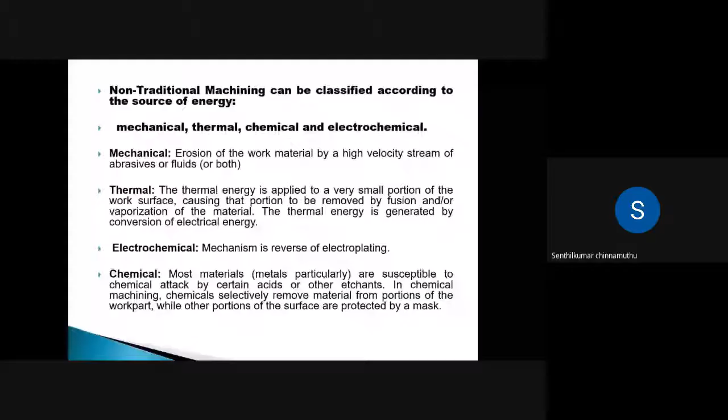In electrochemical machining, the electrochemical reaction is the reverse of electroplating. The material is removed atom by atom, which is called electrochemical machining, under the electrochemical category.

In chemical machining, if you want to remove some portions of material on the surface, we have to mask it, and the material to be machined is exposed to the atmosphere, kept inside acids. The acids remove the material atom by atom, which is called chemical machining.

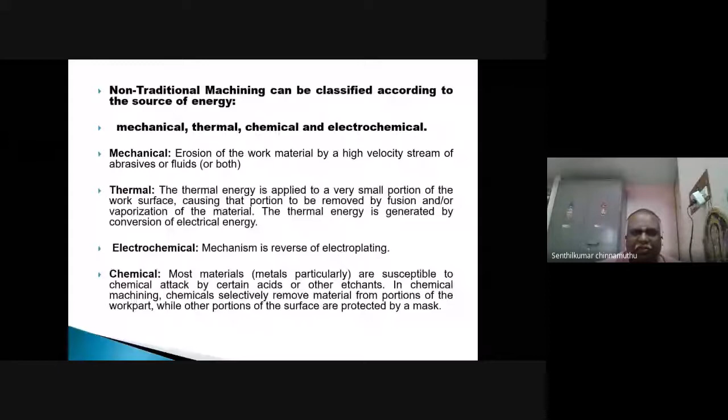Next, electrical discharge machining. I hope all of you are aware that electrical discharge machining is one of the processes in non-traditional machining.

In this process, the formation of a recast layer in the zone just below the machined surface is a common occurrence. The formation of this recast layer on the surface of the workpiece is considered a potential opportunity for researchers to deposit a layer of desired materials.

You might have seen that during electrical discharge machining, after completing the process, if you cut and look through the microstructure, you might see a heat affected zone or recast layer. If you check this recast layer using EDS element analysis, you might find that the layer consists of tool material, workpiece material, and carbon.

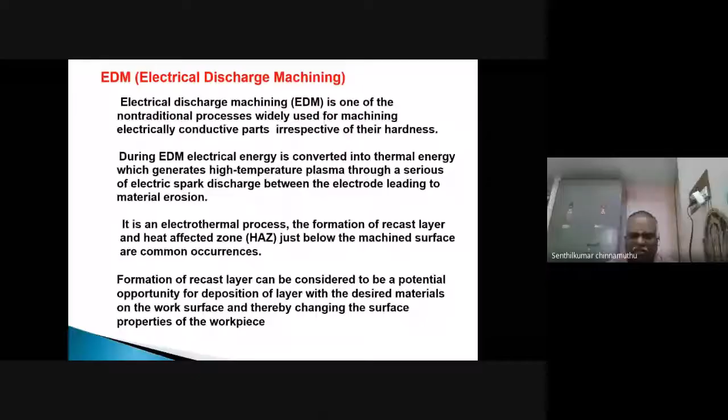Lightweight materials are nowadays being used in aerospace and automotive applications to achieve better energy efficiency and reduce the weight of the component. However, it cannot withstand wear under high load, especially in sliding contact or moving parts.

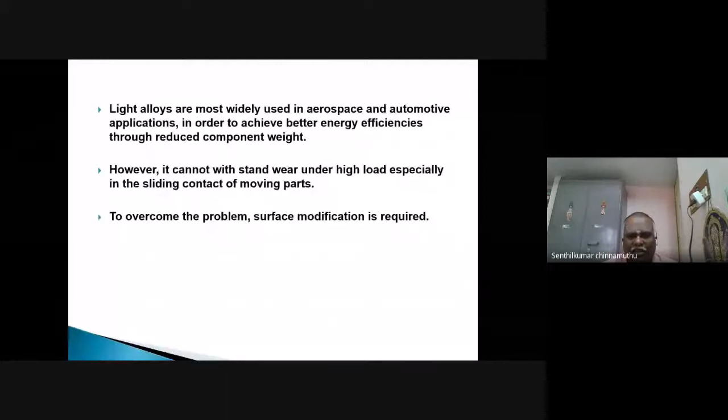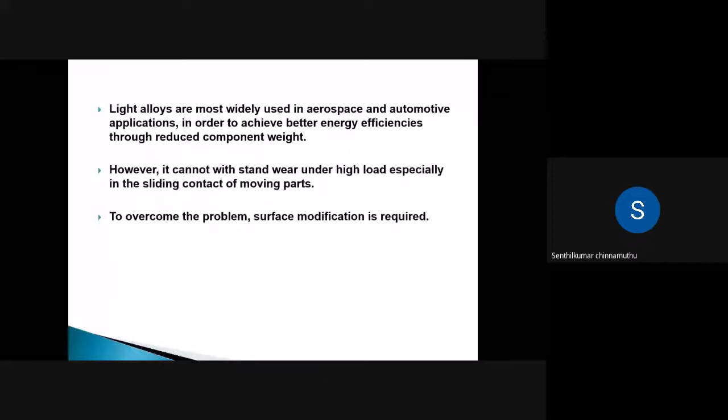If high load is applied, and two parts get mated and slide against one another easily, wear resistance is very low. To overcome this problem, surface modification is required. Many surface modification processes are used, such as PVD and CVD. We have to classify these.

Why do we go for surface modification or surface coating? Surface coating or surface modification is used to enhance surface properties—corrosion resistance, hardness, heat resistance, wear resistance—without changing the original characteristics of the base material.

There are several methods for obtaining different types of surface coatings, which may be classified as thick coating and thin coating. Under thin coating, we have physical vapor deposition, chemical vapor deposition, electrochemical deposition, ion implantation, and electroless plating, which give you 0.002 mm to 0.004 mm of thickness. That is called thin coating.

Thick coating includes plasma coating, thermal spraying, laser cladding, and electro deposition, which give 0.076 to 0.25 mm of coating thickness, which is called thick coating. The above said coating processes need sophisticated machines which incur higher cost, and the process is also complicated.

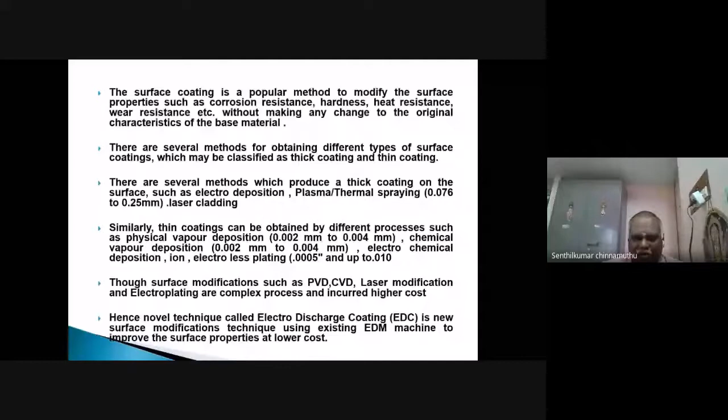The novel technique developed is called electro discharge coating, where we machine or coat the material at less cost using an existing EDM machine to improve or enhance the surface properties.

Electro discharge coating is basically an EDM process. In EDM, the anode is connected to positive, that is the workpiece is connected to positive, which is called anode, and the tool material is connected to negative, which is called cathode. So the current is supplied between these two.

In the EDC process, the process is carried out with reverse polarity, known as electro discharge coating. Here the workpiece is connected to negative and the tool material is connected to positive.

The tool powder metallurgy tool is used as an electrode. Instead of a solid electrode, powder metallurgy electrodes are used, that is, the desired material.

If you want to coat tungsten carbide or titanium diboride, let us take titanium boride or tungsten carbide as the electrode. It depends upon our choice. During the process, material from the tool electrode is transferred and deposited on the surface as a hard layer.

It can be used to enhance the tribological properties such as micro hardness, wear resistance, and corrosion resistance, without any physical change in the workpiece material.

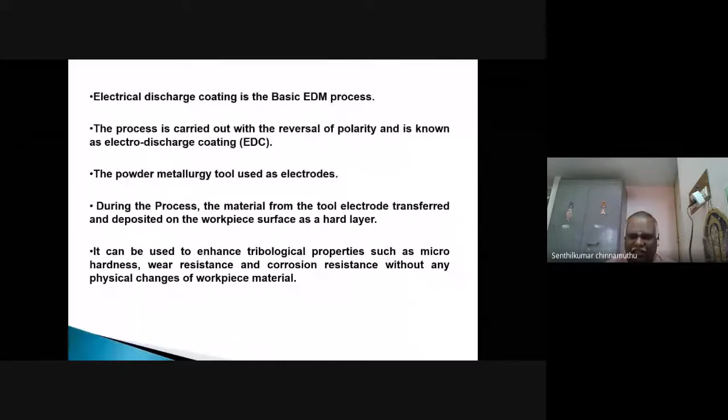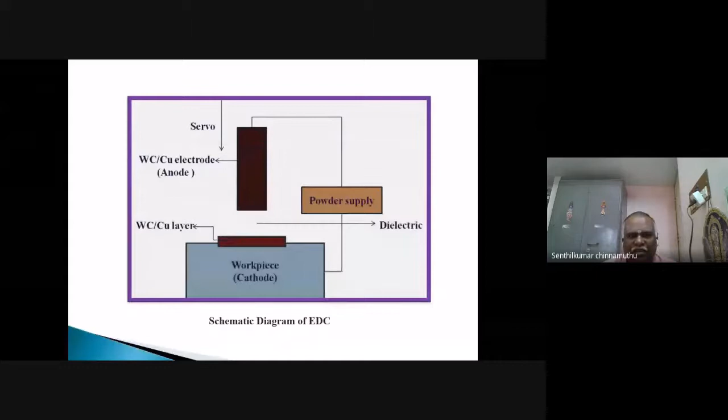This is a schematic diagram of EDC. Here the workpiece is connected to negative, and the tool, that is the powder metallurgical tool, is connected to positive, with a power supply given between the two.

The workpiece attracts more cations, that is positive ions, and the tool attracts the anions, that is negative ions. A larger amount of material is disintegrated from the tool electrode and deposited on the surface of the workpiece. This is the schematic diagram of electro discharge coating.

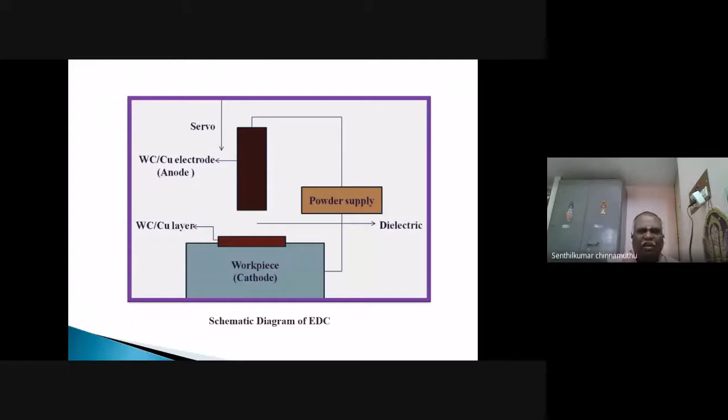Advantages of electro discharge coating: it is less expensive because there is no need for sophisticated equipment or special equipment to control the coating thickness.

Hard coating can be easily created on the workpiece using the existing EDM machine. The coating can be created in different zones of the workpiece with different areas, and the coating speed is also very fast.

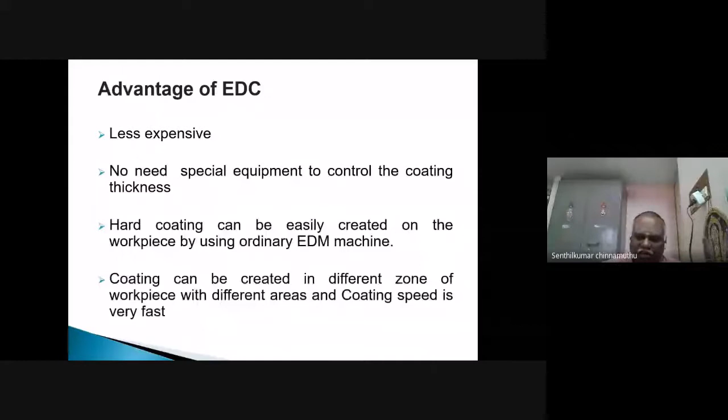Application: EDC can be used in rolls texturing, improving hardness and performance. It can be used in various industrial applications like tool, die, and mold manufacturing industries to improve wear, corrosion, and oxidation resistance of parts.

It can be used to enhance the wear resistance of lightweight alloys used in the aerospace and automobile industries.

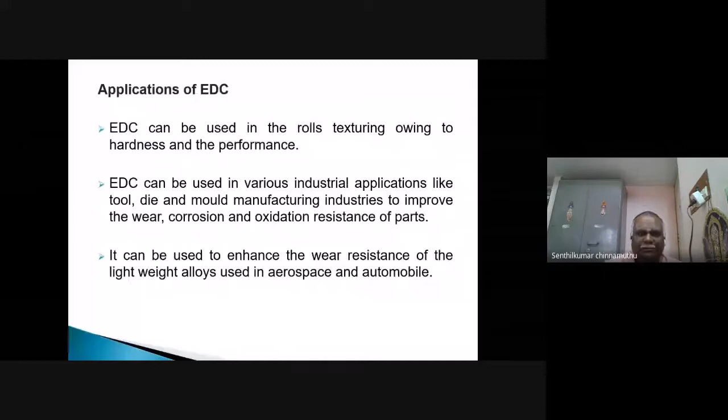Let us consider a magnesium alloy. In this case study, we select a magnesium alloy as a lightweight material and coat it with the help of tungsten carbide using electro discharge coating. Why do we go for magnesium alloy?

Nowadays, magnesium alloys are being adopted by the automobile and aerospace industries because of their lightweight compared to aluminum. But the load carrying capacity and wear resistance of this material is very low, so we go for electro discharge coating.

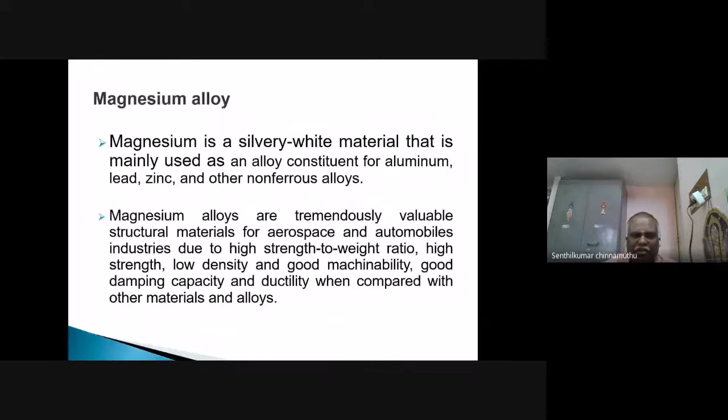Magnesium is a silvery white material mainly used as an alloy constituent for aluminum, lead, zinc and other non-ferrous alloys. It is a valuable structural material in automobile and aerospace industries due to its high strength-to-weight ratio, low density, good machinability, good damping capacity and ductility compared with other materials and alloys.

Advantages of magnesium alloy: lightweight and low density, high specific strength, good castability, suitable for high pressure die casting, good machinability, high thermal conductivity, high dimensional stability, and higher vibration absorption.

Applications of magnesium alloy: cylinder head cover, engine intake manifold, motorcycle wheels, helicopter gearboxes, key lock housing, and steering wheel.

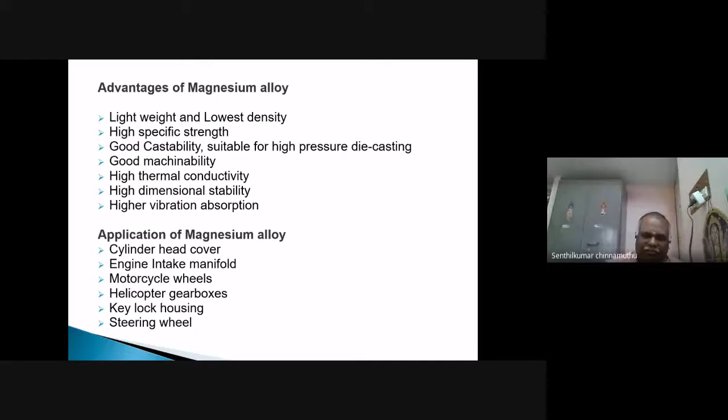The electrode material chosen is tungsten carbide and copper. Copper is mixed with the tungsten carbide powder to conduct electricity.

The magnesium plate of 170 mm length, 50 mm width and 5 mm thickness has to be taken for the electro discharge coating.

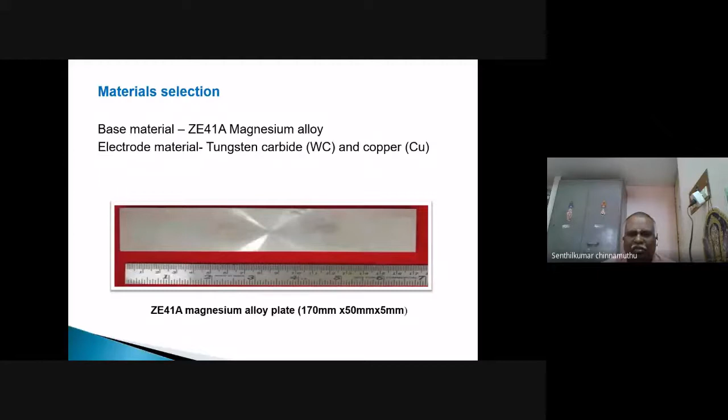The properties of ZE41A magnesium alloy are: density of 1.9 gram per centimeter cube, melting point of 532 to 638 degrees Celsius, specific heat 970, thermal conductivity 24, coefficient of thermal expansion 15.1. And the properties of tungsten carbide and copper powder follow.

The copper density is 8.97, melting point 1082 degrees Celsius, specific heat 385, thermal conductivity 393, coefficient of thermal expansion 16.5, and a particle size of 4 microns.

Similarly, for tungsten carbide, the density is 19.29, melting point is 2870 degrees, specific heat 138 joule per kilogram Kelvin, thermal conductivity 110 watt per meter Kelvin, coefficient of thermal expansion 5.5 micrometer per meter degree Celsius, and the particle size is 4 micron.

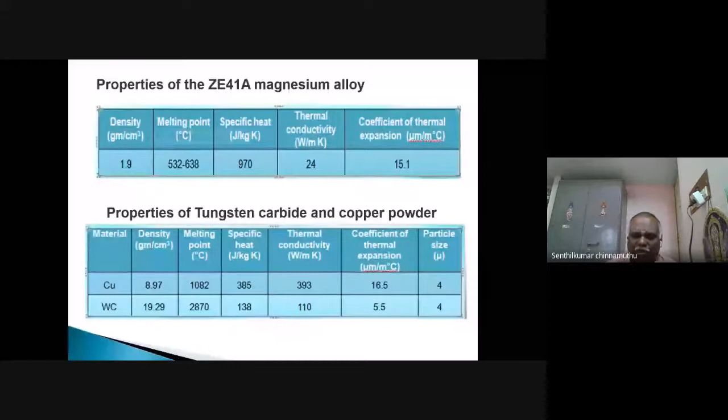Experimental planning and procedure: electrodes were prepared by powder metallurgical method using a combination of 50-50%, that is tungsten carbide 50%, copper 50%, in semi-sintered and sintered forms. Two types of electrodes were used, semi-sintered and sintered, to compare both tools and evaluate the hard deposit layer and its characteristics, including how much material is deposited using each.

We have to evaluate what the mechanisms are. EDC experiments are conducted using the prepared electrodes, and wear tests are conducted, that is, the wear resistance of the coated specimen was evaluated using the optimized parameters.

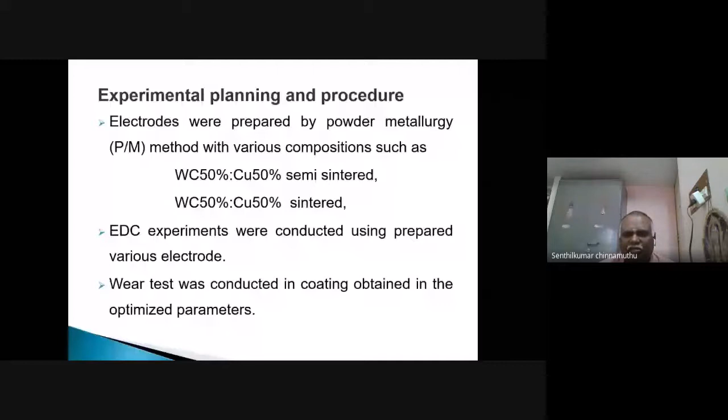The double cone mixer parameter is 300 RPM, rotating at that speed to get the proper mixture. The time taken for mixing is 30 minutes, which is taken from the literature, along with the 300 RPM speed, to achieve proper mixing.

Finally, we compress the powders inside the cylindrical die using the 150-ton hydraulic press. Various pressures were selected to study the properties and evaluate the coating characteristics at each pressure. The powder metallurgical green compact electrodes were prepared using this press.

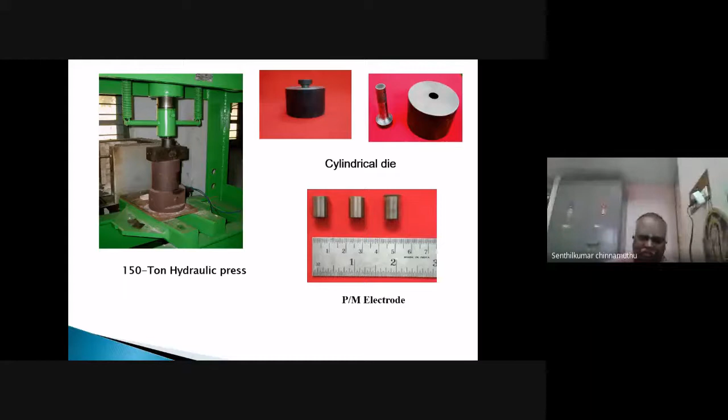Sintering is carried out in a tubular furnace with an argon atmosphere, with sintering time of 20 minutes. Why argon gas? Without it, atmospheric air inside the furnace contaminates the green compact. Using argon gas evacuates the atmospheric air, making the environment inert, so we can obtain a proper sintered or semi-sintered product.

The sintering temperature for semi-sintered is around 600 degrees Celsius for 20 minutes. For full sintering, we go to 900 degrees Celsius for 20 minutes. So for the 50-50 combination of tungsten carbide and copper, semi-sintered requires 600 degrees Celsius for 20 minutes, while sintered requires keeping the component in the furnace at 900 degrees Celsius.

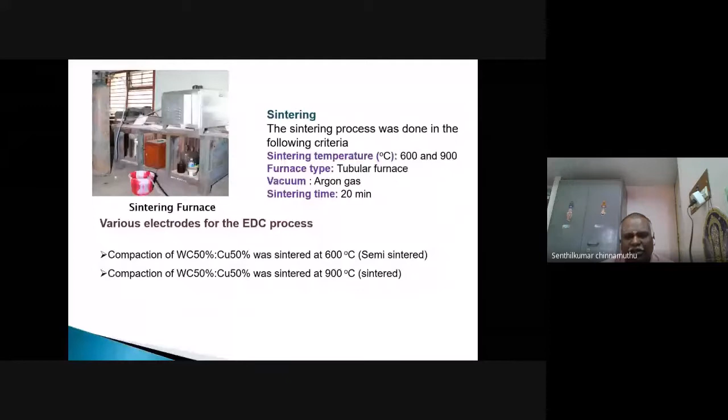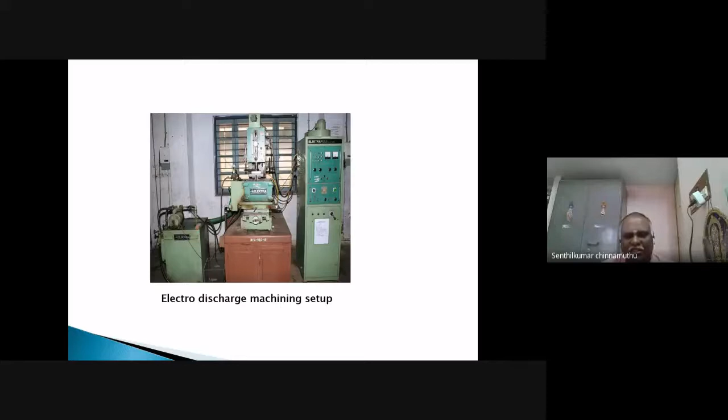This is an electro discharge machining setup. This EDM setup is available in the non-traditional machining lab in the Department of Manufacturing Engineering, Annamalai University, where we conduct the experiments.

These are the parameters we have chosen. Various electrode discharge parameters are available: current, pulse on time, pulse off time, flushing pressure. But current and pulse on time are suitable for electro discharge coating, so we opted for these. The compaction load is also considered for the electrode coating parameters, that is, the surface modification parameters: compaction load, current, and pulse on time.

Three parameters, three levels: compaction load of 150, 175, and 200, used to compact the specimen to evaluate coating characteristics. Similarly, three levels of current were used: 2 amps, 3 amps, and 4 amps, and pulse on time of 50, 70, and 90 microseconds.

So, with three parameters and three levels, 20 experiments were conducted according to the central composite face-centered design. The experiments were conducted, and finally we obtained the tungsten carbide-copper coated workpiece.

The workpiece was cut into rectangular shapes to study the surface characteristics: how much element is deposited on the workpiece surface, what elements are deposited, the quantity deposited, and the surface morphology of the workpiece.

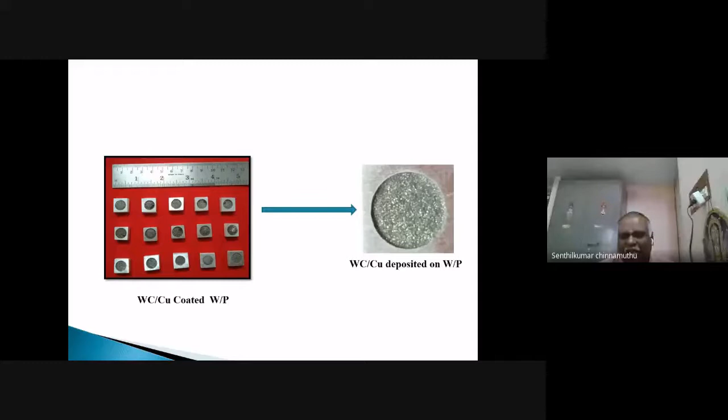This second figure shows the deposited tungsten carbide-copper layer on the workpiece, that is, a macrograph of tungsten carbide-copper deposited on the workpiece.

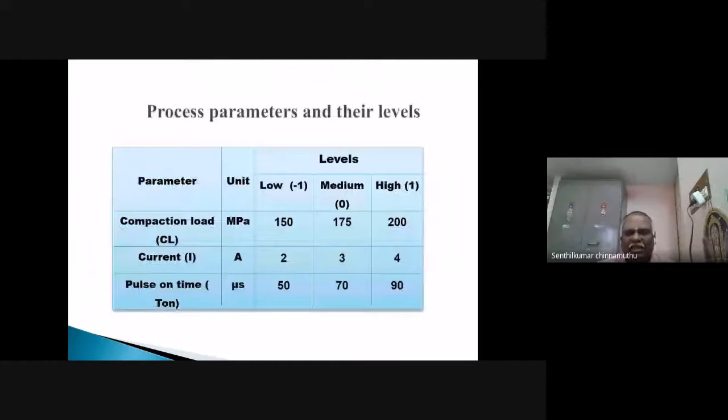And the current. At low compaction load, the material deposition is higher. But in case of higher compaction load, the material deposition is lower. Why? Because at lower compaction load, the bonding between the materials, that is the copper as well as the tungsten carbide, is very less.

So it dislodged freely and deposited on the workpiece. And at low current, the amount of electrical energy conducted in the machining zone is very less, so that causes deposition of the electrode due to erosion, instead of deposition there is.

But if you increase the current value, more amount of energy is supplied in between the interelectrode gap, so the material gets melted and vaporized. There is no material deposition. Conversely, material erosion takes place. Lower current: material deposition takes place. Higher current: material erosion takes place, that is, material removal takes place.

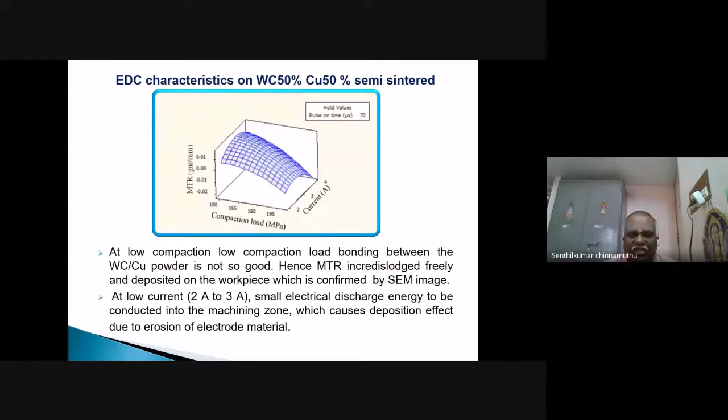See the surface morphology at low compaction load. The bulk mass deposition takes place. Bulk mass means at low compaction load, that is very less, that is 150 megapascal, the particles are loosely bonded and easily disintegrated from the tool material, and it deposited non-uniformly, as a bulky mass.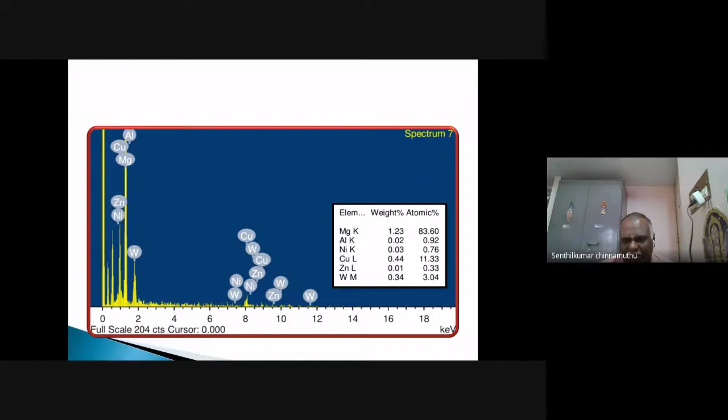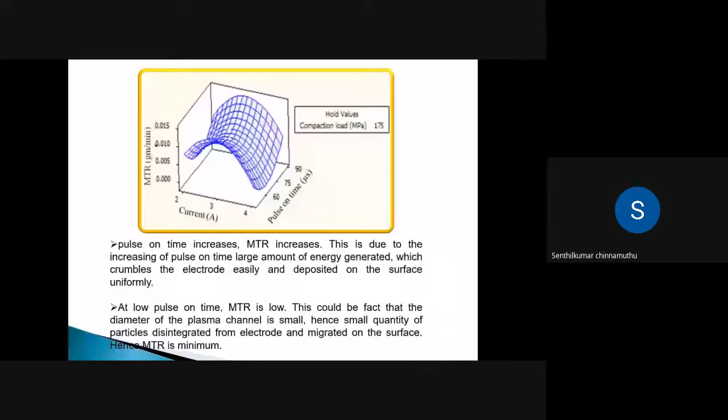And the surface property - the second figure shows the metal transfer rate, the effect of metal transfer rate on current and pulse on time. The current value increases from higher to lower. See, lower to higher, from 2 to 3, the material deposition increases.

Due to lower current, the material is dislodged, already as I told in the previous graph. Similarly, from 2 to 3, the material deposition increases, and then from 3 to 4, it decreases. It declined because from 3 to 4, more amount of energy is supplied in between the interelectrode gap, and it melts and evaporates more material.

So conversely, erosion takes place. Similarly, for pulse on time, at lower pulse on time, material erosion takes place. But at higher pulse on time, current is supplied for a longer time - current supplied time is pulse on time. So if you enlarge the current supply time, the plasma channel gets enlarged, and more material is disintegrated from the material and deposited on the surface.

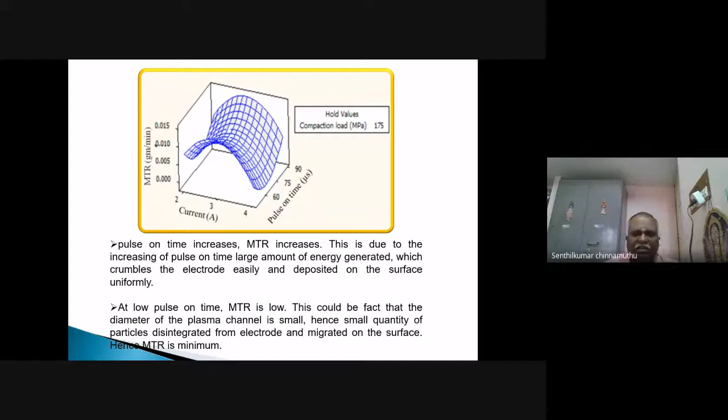See the figure shows the same morphology. Higher pulse on time shows uniform deposition with sized spherical particles deposited on the surface. At higher pulse on time, more material is melted, and again it deposits as uniform spherical sized particles on the surface.

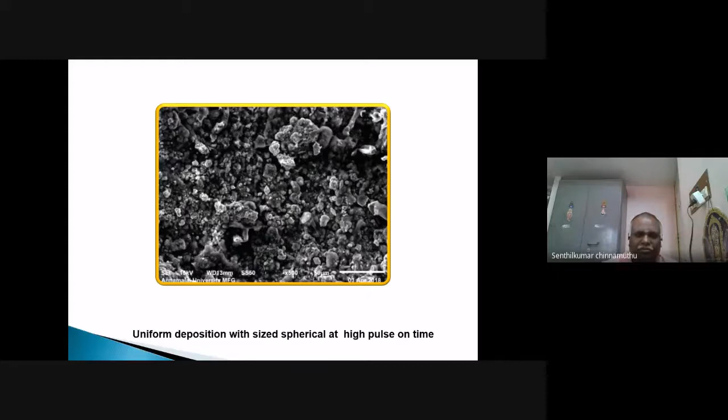The surface roughness - the effect of compaction load and current on surface roughness. The surface roughness increases with compaction load. Why? Because at lower compaction load, the surface roughness is very less and uniform, because more amount of material is disintegrated and deposited on the surface uniformly.

Whereas in the case of higher compaction load, the bonding between the material is higher, so the material is deposited non-uniformly on the surface at higher compaction load. So random deposition takes place.

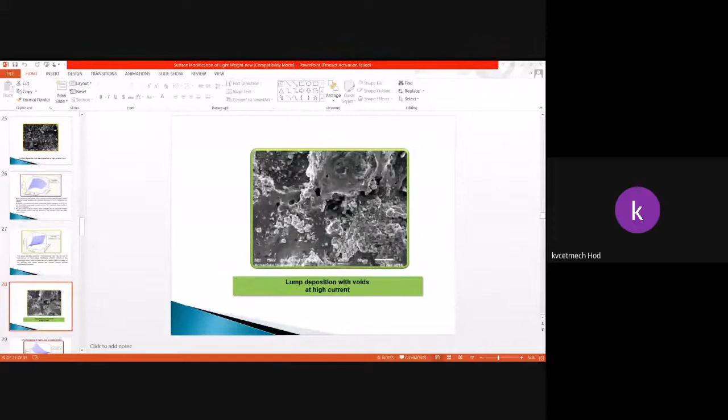At high current, more amount of material is deposited, vaporized and melted, and gas bubbles are formed. The gas bubbles are evacuated from the surface of the workpiece so that voids are formed. The gas bubbles generate the voids, and the gas bubbles deposited generate the voids, which determines the void size.

The higher current determines the void size. Higher the current, more the voids, and the size of the voids is also higher.

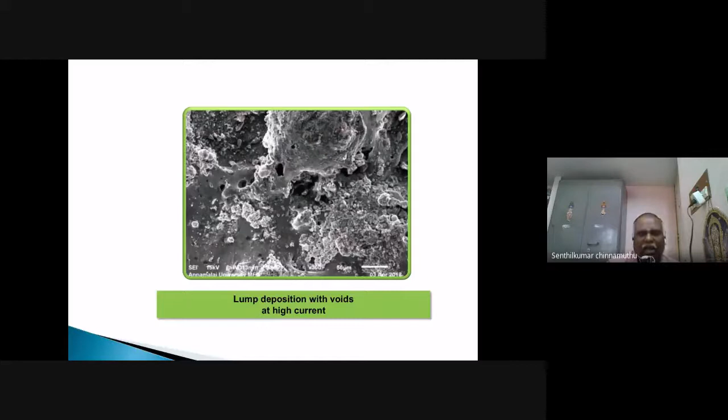Regarding the EDC characteristics on 50% tungsten carbide copper sintered electrode, the effect of compaction load and current on metal transfer rate: at lower compaction loads, similar to semi-sintered, the metal transfer rate is higher, but at higher compaction load, the metal transfer rate is negative.

That is called metal removal takes place. Conversely, instead of metal transfer, at higher compaction load, material removal takes place because it resembles a solid metal.

Similarly, in the case of current, at lower current, material deposition takes place, but at higher current, material removal takes place.

At low current setting, 2 to 3 amps, the quantity of electrode material migrated onto the workpiece surface is low due to poor heat energy conduction in the machining zone, so more material is disintegrated from the tool material and deposited on the surface.

If higher current is used, removal takes place instead of deposition.

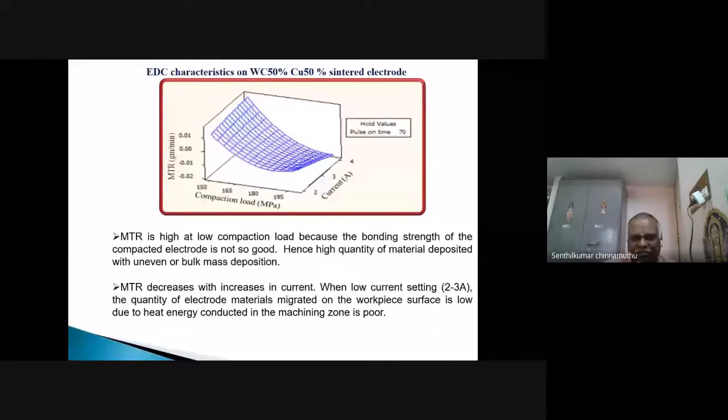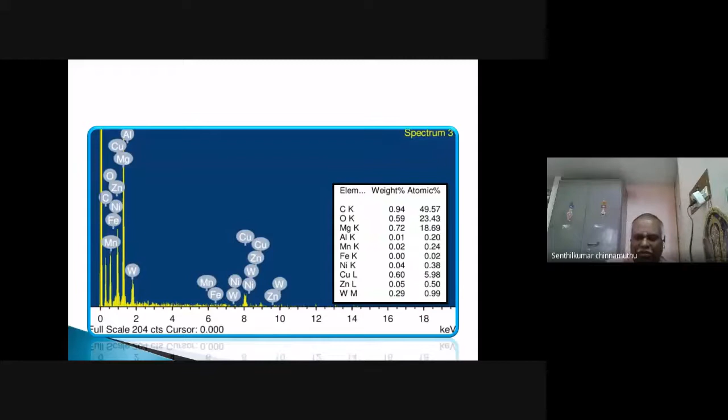Regarding the effect of current and pulse-on time on metal transfer rate: the metal transfer rate decreases with increase in current and pulse-on time. At lower settings, the metal transfer rate is high, but with further increase in current up to 4 amps, the material transfer rate decreases.

This can be explained by the fact that with higher pulse-on time and current, the discharge energy is higher, which melts more material and evacuates the molten pool, which is evaporated during the EDC process. Hence MTR is low, and conversely, metal erosion - that is, metal removal - takes place.

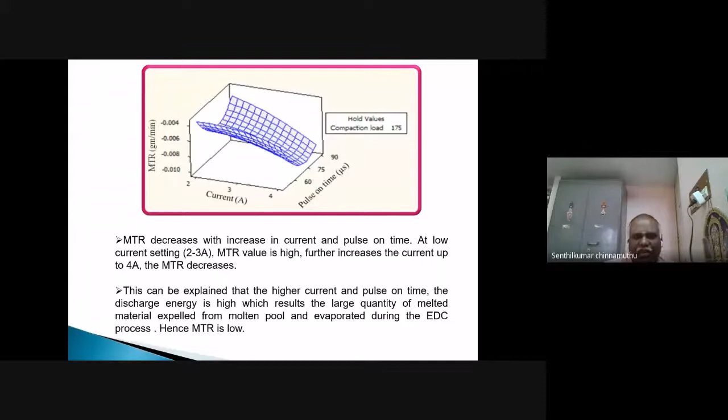This graph shows the effect of compaction load and current on surface roughness. At lower compaction load, instead of erosion, there is rapid uncontrolled metal transfer onto the surface, forming shallow craters. At higher compaction load, more material is eroded and deposited on the surface, with uniform deposition taking place, which is why the surface roughness is less.

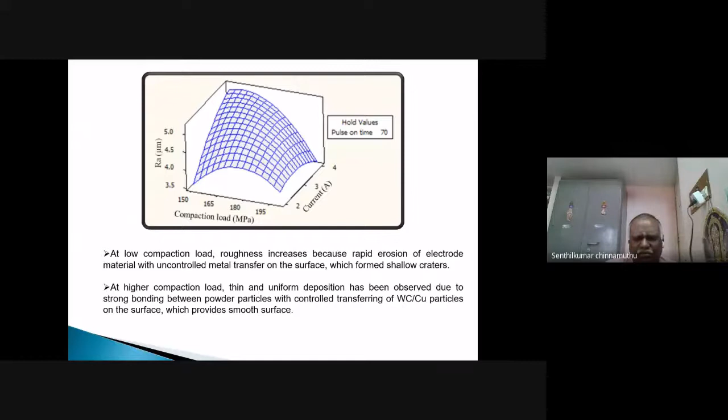Similarly, at lower current, a small amount of material is deposited - a thin coating is obtained. But at higher current, a large amount of material is melted and gas is generated, which when evacuated from the surface produces cracks, shallow craters, and globules are formed.

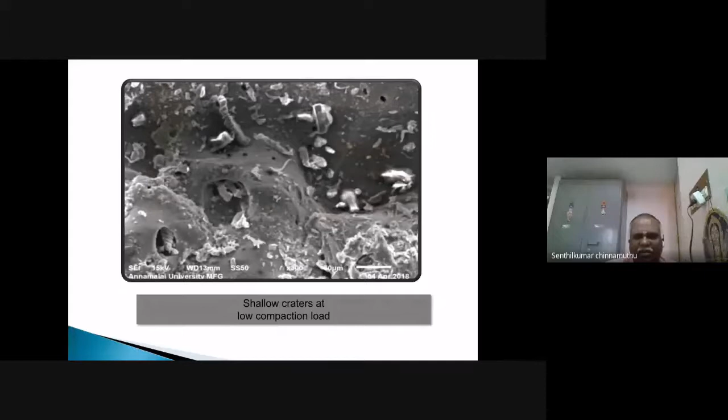This is the shallow craters, at low compaction load and higher currents. The shallow craters are determined by the higher current, because the gas formed during the electrical discharge coating process is expelled from the molten pool, generating voids or shallow craters.

This is the crater size, and the number of craters is determined by the current.

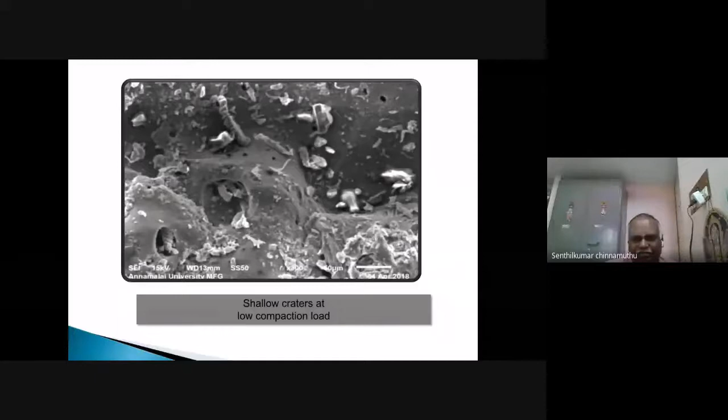Regarding surface roughness: the effect of current and pulse-on time on surface roughness - if both current and pulse-on time keep increasing, the surface roughness increases because more material is melted and deposited on the surface.

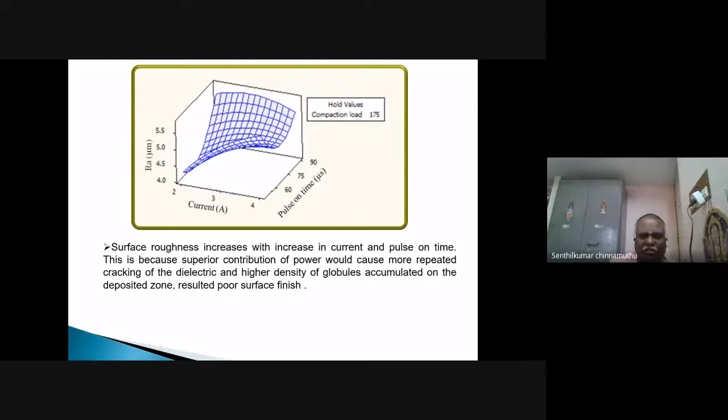Whereas at lower current and lower pulse-on time, material is deposited, but at higher current and pulse-on time, erosion takes place because repeated sparks crack the dielectric more, and high density globules are formed or accumulated on the surface, resulting in poor surface roughness. Globules occur at higher current - this is the globules which occur at high current.

The globules are formed due to high current, where more material is melted and again redeposited on the recast layer, which is in the form of globules.

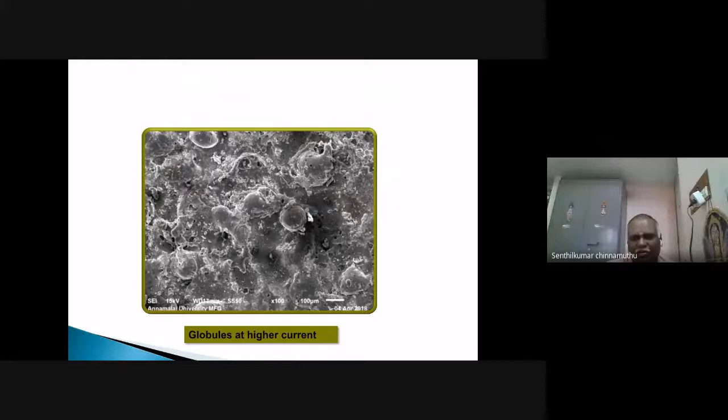Optimization has been carried out to find the maximum metal transfer rate and minimum surface roughness using RSM optimization technique. Equal weightage is given for metal transfer rate and surface roughness: 50% for metal transfer rate, 50% for surface roughness.

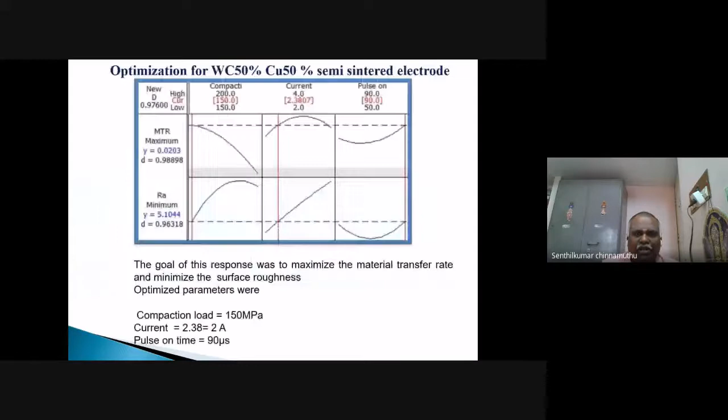The validity experiment has been conducted using the optimized parameters: compaction load of 150 megapascal, pulse on time of 90, and current 2.3807, approximately equal to 2 amps, because we could not set 2.38 in the machine. It is not available in the machine, so we have to approximately take 2 amps.

The 0.0203 and 5.104 are predicted from the RSM optimization. With the help of this compaction load, current and pulse on time, that is the optimized value, again we have to conduct the experiment. Finally, we get 0.0198 metal transfer rate and 5.237 surface roughness.

The percentage error was calculated for the metal transfer rate and surface roughness. For metal transfer rate, the percentage error is 2.4; for surface roughness, it is 2.5, which comes under plus or minus 10%. This is statistically significant and confirms good agreement between the experimental and predicted values, showing good reproducibility of the experiment.

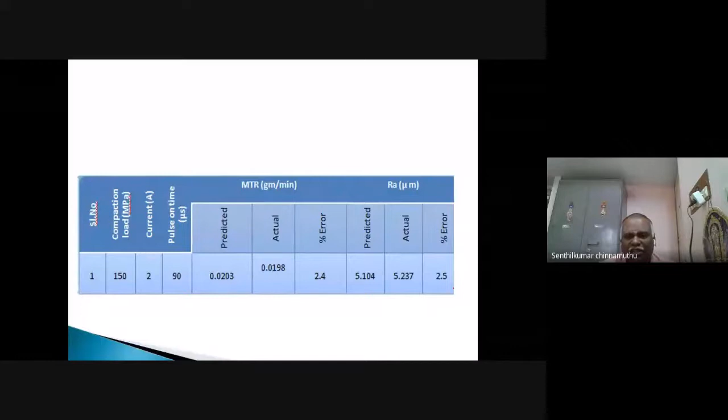Similarly, optimization for the sintered electrode, 50% tungsten carbide and 50% copper sintered electrode, was carried out. Finally, we have a compaction load of 150, current of 3.437, pulse on time of 50 microseconds, and maximum MTR of 0.0183 and minimum surface roughness of 5.2581.

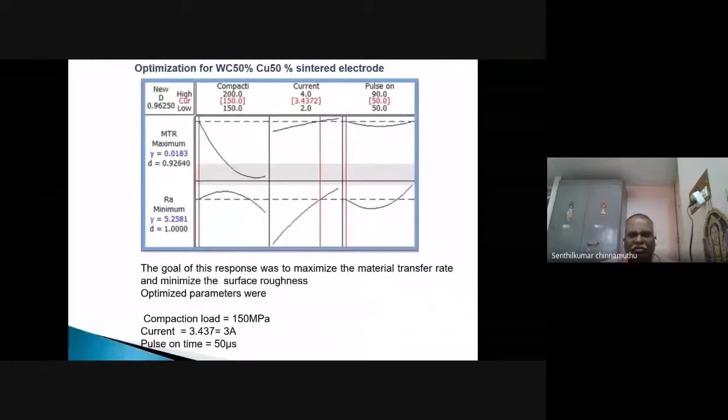The goal is to maximize the metal transfer and minimize the surface roughness. The optimized parameters are 150 megapascal, 3.43 amps approximately taken as 3 amps since 3.43 is not available in the machine, and pulse on time of 50 microseconds. Again we have to go for the validity test using 150 megapascal, current of 3 amps, and pulse on time of 50 microseconds.

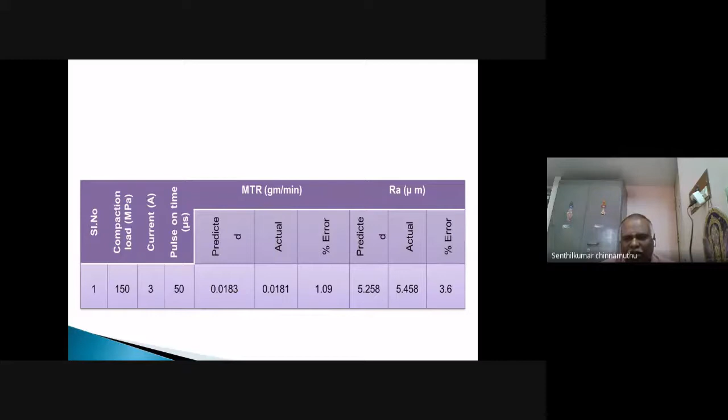The actual value obtained again at the optimized parameters: metal transfer rate is 0.0181, surface roughness is 5.458. The percentage error for metal transfer rate is 1.09 and for surface roughness is 3.6, which is below plus or minus 10%. This is good agreement between predicted and actual values, confirming reproducibility of the experiment.

Finally, with the help of the optimized parameters, we have to coat the magnesium alloy. Nine experiments using L9 orthogonal array were considered, and wear parameters were selected, then we coat the material with these pertinent optimized parameters. Finally, we have to check whether it enhances the wear resistance or not with the help of the wear test.

So what is wear? Wear is a process of removal of material from one or both solid surfaces in solid state contact. In both rubbing or rolling action, material is removed. When two solid surfaces are in sliding or rolling motion together, material is removed, which is called wear.

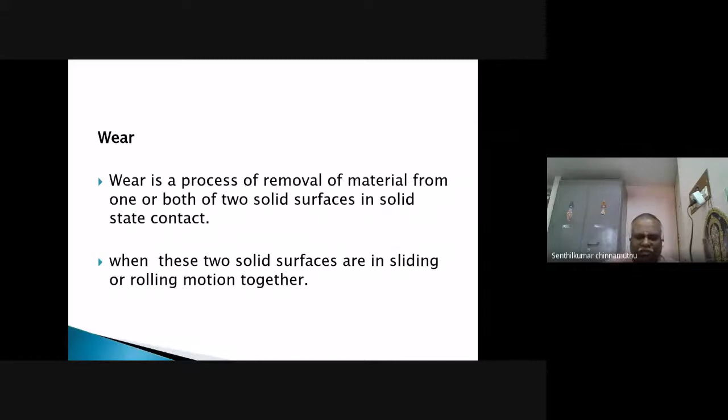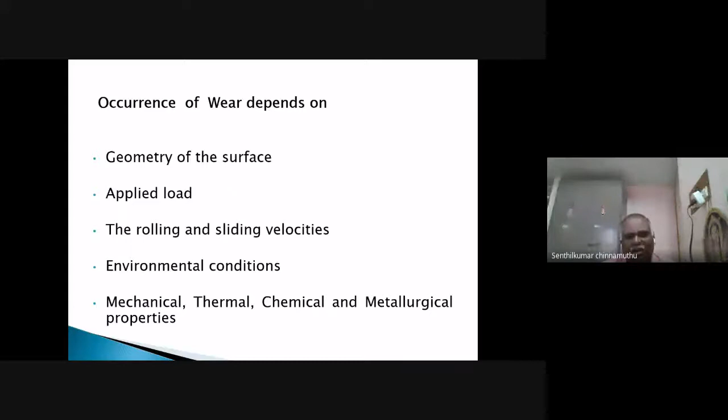Occurrence of wear depends on the geometry of the surface, applied load, rolling and sliding velocities, environmental conditions, and mechanical, thermal, chemical, and metallurgical properties. These are all the 5 properties that determine wear: geometry of the surface, applied load, rolling and sliding velocities, environmental conditions, and mechanical, thermal, chemical, and metallurgical properties.

Wear mechanisms: classification of wear mechanism and wear coefficient range. Wear dominated by mechanical behavior of material includes deformation and removal, wear caused by ploughing, delamination wear, adhesive wear, abrasive wear, fretting wear, and wear by solid particle impingement.

Wear dominated by chemical behavior includes solution wear, oxidation wear, diffusion wear, wear by melting of the surface layer, and adhesive wear at high temperatures. So we have to classify it according to mechanical behavior as well as chemical behavior.

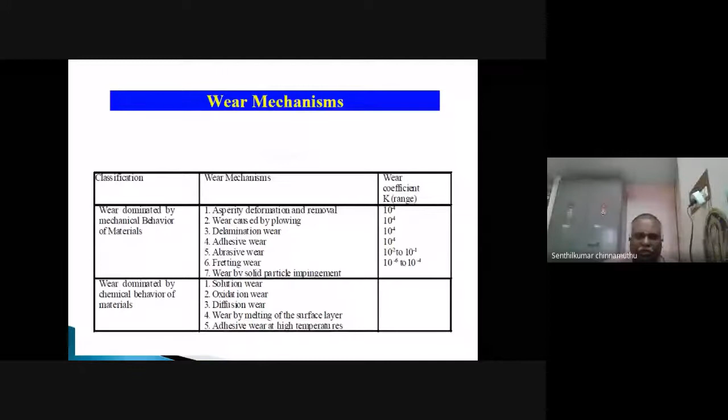Abrasive wear occurs when a harder material rubs against a softer material, marking the onset of wear. The hard particles are pulled out from the surface due to the applied load or pressure. When tangential force is imposed on the pin material, the softer surface is removed by the combined effect of micro ploughing, micro cutting, or micro cracking. As a result, the worn surface is generally characterized by grooves and scratches.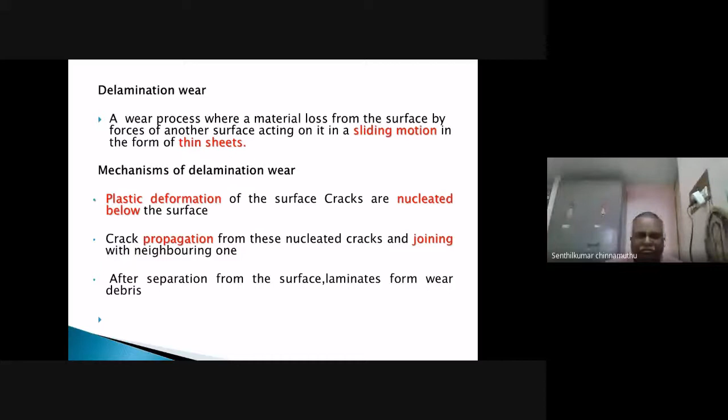Delamination wear occurs due to subsurface nucleation and propagation. Nucleation means the crack is formed, and then it is propagated and enlarged. These are the basic steps of delamination wear.

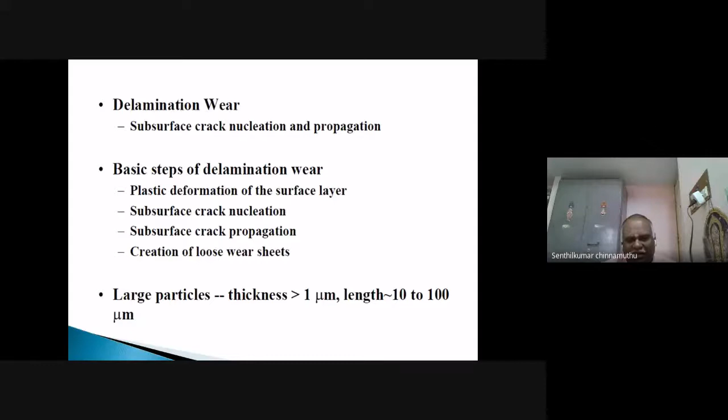Plastic deformation of the surface layer first occurs. Due to this plastic deformation, a crack is nucleated on the subsurface, below the surface. That crack is propagated, creating loose wear sheets of large particles, greater than 1 micron in thickness, with a length of 10 to 100 microns.

You might have seen that figure. First, the load and the pin are moved on the surface. Figure B shows the material being plastically deformed and the crack nucleated under the surface. Again the crack is propagated in C, and in figure D, it is removed in the form of flakes or thin sheets. This is called delamination wear.

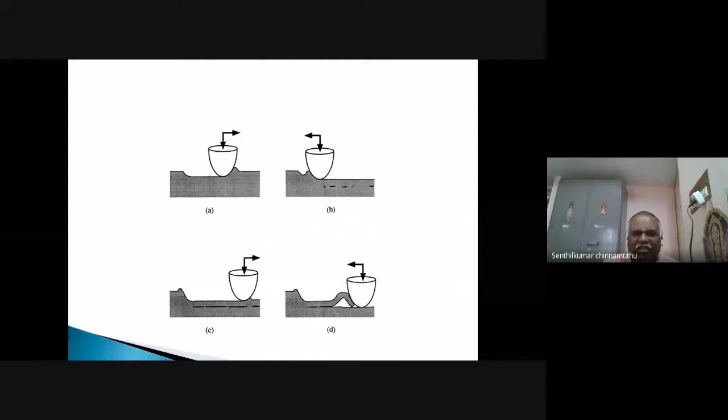Wear mechanism map: why do we go for this? It is a new kind of research. From the wear mechanism map, we have to find which zone is the safest zone. As a design engineer, you have to select which zone is the safest zone to design a material.

It is a graphical representation used to study the effect of sliding parameters on wear rate. It is the best description of tribological conditions, and it is useful for design engineers in selecting materials across a wide range of operating conditions. The development of wear maps is a useful way to study and predict the wear behavior of materials against different sliding parameters. The wear mechanism map is used to identify the dominant wear mechanism for a particular operating condition.

The wear map is constructed by taking sliding speed on the x-axis, normal load on the y-axis, and wear rate on the z-axis, because normal load and sliding speed are the most significant wear parameters compared to others. In this study, using 50-50% semi-sintered and 50-50% sintered material coated on ZE41, a magnesium alloy, electro-discharge coated magnesium alloy, the wear mechanism maps for these two materials were developed.

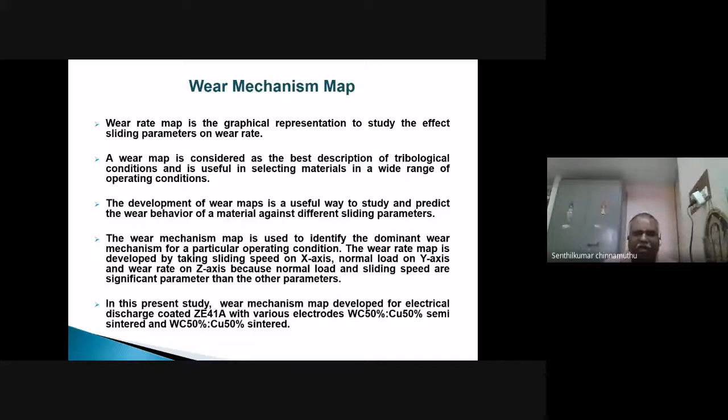Wear mechanism for tungsten carbide 50% and copper 50% semi-sintered electrode. In the mild wear region, that is the sliding speed of 100 to 200 and normal load of 1.5 to 2.4, the material is first contacted, the normal load is applied at 1.5 up to 2.4, and the sliding speed is increased from 100 to 200.

The abrasion takes place, that is the asperities and coated particles are pulled out slightly and scratches are developed. After that, the oxide layer formed on the surface is removed, so oxidation occurs. If the sliding speed goes beyond 200 RPM and 2.4 normal load, delamination takes place, and the coated particles get delaminated from the surface, causing severe wear.

This zone is called the severe wear zone. In the ultra severe wear zone, with further increase in sliding speed and normal load, the contact between tool, pin and disc material is more, and friction between pin and disc is higher. Due to higher friction, temperature increases and melting of the material takes place, finally resulting in seizure. So the mild wear region is the safest region for design engineers.

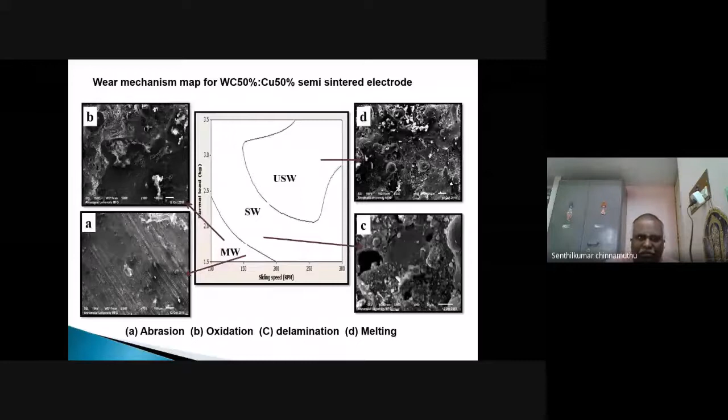Wear mechanism map for 50% tungsten carbide and 50% copper sintered electrode. The mild wear region is up to 160 sliding speed and normal load up to 2.4. Abrasion and oxidation take place in the mild wear region, as already seen in the semi-sintered electrode. Abrasion is nothing but scratches, and oxidation is the removal of the oxide layer and removal of material. This is the mild wear region, which is the safest zone.

So if the design engineer wants to design a component with 50% copper, 50% tungsten carbide sintered electrode, the safest sliding speed is 100 to 160, and the normal load is 1.5 to 2.4.

In the severe wear region, if you increase the sliding speed beyond 160, delamination takes place. In the earlier case, up to 200 was safe, but in this case delamination occurs at 160, because in the semi-sintered case more material is deposited, whereas in the sintered case the layer is very thin. So delamination takes place earlier, and ultra severe wear takes place at about 250 RPM and normal load of 3.5.

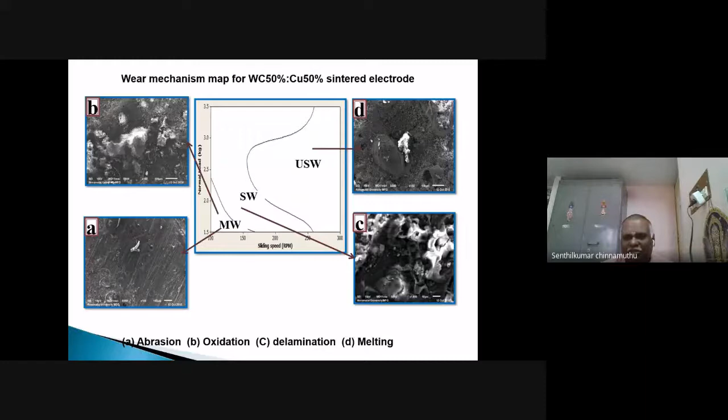Conclusion from the coating of ZE41A magnesium alloy: the metal transfer is high at low compaction load due to low bonding of the powder metallurgy electrode, so more metal is deposited from the electrode. In the case of higher compaction load, higher current and higher pulse-on time, erosion takes place instead of transfer, that is, metal removal takes place. Similarly, surface roughness increases with increase in current, pulse-on time, and low compaction load.

Optimization was carried out using RSM, and the predicted coating performance was compared with the actual coating performance, with good agreement obtained within plus or minus 10%, which is statistically significant. The tungsten carbide 50%, copper 50% semi-sintered electrode is better for EDC, because the semi-sintered electrode dislodges more material and produces a thicker coating than the sintered electrode.

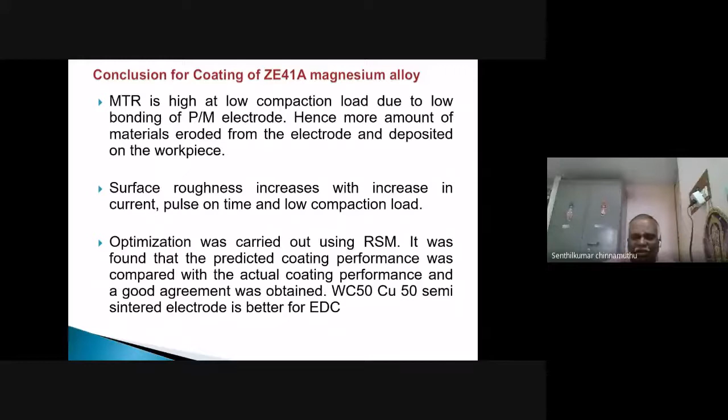Conclusion from the wear behavior: a wear mechanism map was developed to identify the various regimes called mild wear, severe wear, and ultra severe wear, and to identify the safest region, safest load, and safest sliding speed. The surface morphology was evaluated using SEM, and the influence of wear mechanisms such as abrasion, oxidation, delamination, and melting were identified and summarized in the wear mechanism map.

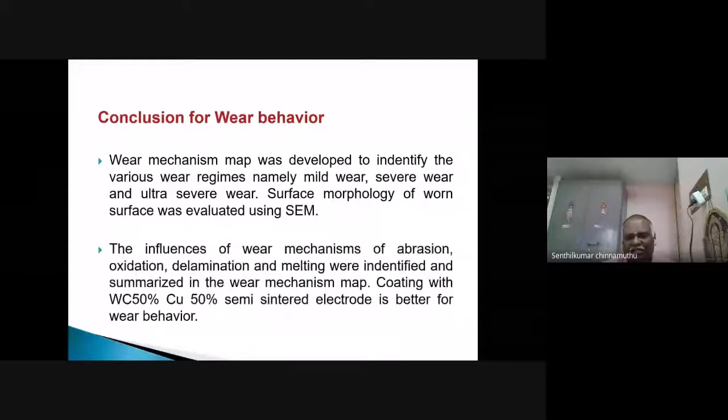Coating with 50% tungsten carbide, 50% copper semi-sintered electrode is better for wear behavior and increases wear resistance compared to the sintered electrode. Thank you very much.